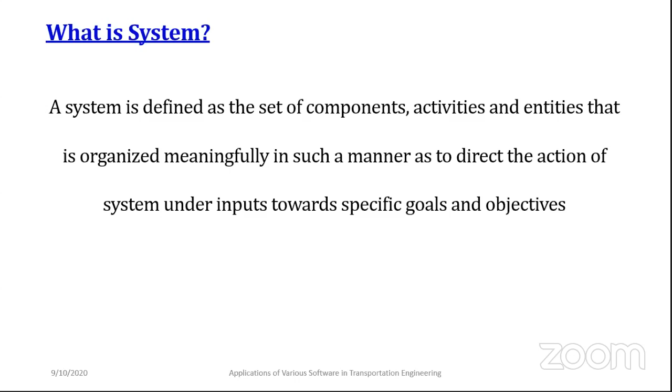This is a generalized definition of a system. But when it comes to transportation, how is the system defined? The transportation system is nothing but the combination of different modes - it might be airline or airways, waterways, railways, as well as roadways. So the combination of all these ways - and within each way, if you go to the micro level, you might see different classifications. For example, when we talk about roads, we have buses, two-wheelers, trucks - so different kinds of classifications are there, and all these things are considered within that particular transportation mode.

Within that mode, we have different things. When we talk about roads - signalized intersections, unsignalized intersections, foot overbridges, flyover bridges - all these things are considered together when we try to develop that system, which we consider a transportation system. So the transportation system is nothing but the combination of all the modes as well as all the ways to achieve our goal. Our goal is to make the flow smooth when you are making your journey from your origin to your destination. If you are providing and fulfilling that requirement, that is considered a perfect transportation system.

So basically, the transportation system plays a major role in four categories. One is economic.

It is giving the input for the economy of India or any other country. It is developing and creating social and cultural interactions between people as well as road users. The political things also play a major role, particularly when it comes to military purposes. Finally, it gives a major role for environmental conditions. So these are the four major roles of transportation systems, how it gives contributions to society.

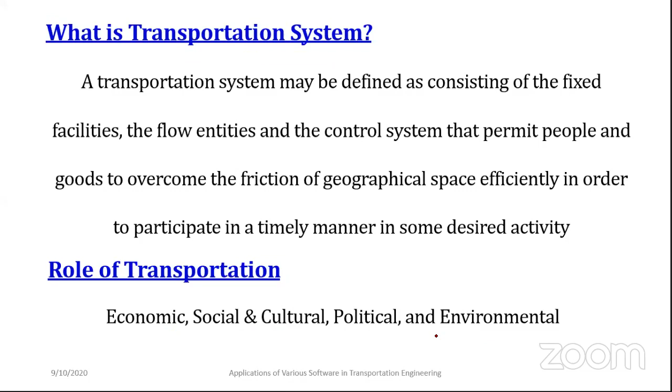So with respect to the things we discussed in the previous slide, these are the different kinds of modes. So altogether we consider as modes of the system: highways, airways, waterways, and ropeways. And for each way, when we talk about highways, it has a way.

That means we have to construct the road. It might be the pavement road or the flexible road. Different kinds of vehicles are there - it might be the motorized vehicle, non-motorized vehicle, electrical vehicle, or autonomous vehicle. Then the terminal, the stations, and the parking area. The control, as I told, signalized intersections or signboards and all. So all this together is considered as components of the mode.

Likewise, each mode has this component. Finally, here we play the major role of how the planning has been done, evaluations have been done with respect to the design, constructions have happened, we applied for the operations, and finally the maintenance happened for that particular facility. So this is the development of each component, how stage by stage it has happened. So all these three together, what we have provided on the field, is considered as a transportation system.

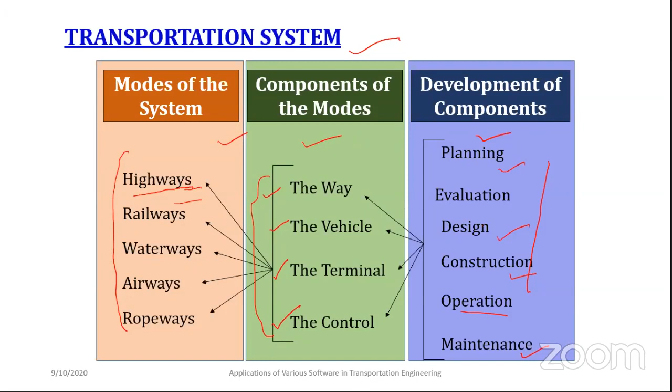So this is the definition of the transportation system. I hope everybody is getting a clear knowledge. So with respect to that, this is a generalized definition of transportation engineering.

For example, if you want to transfer goods or passengers from one place to another, that is considered as transport - that is named transportation. To transfer all the goods and passengers, whatever science and technology we have adopted in that field, that is considered as transportation engineering.

So nowadays we have advanced facilities. For example, Metro technologies are there, mass rapid transit systems are there. These are the things coming under transportation engineering.

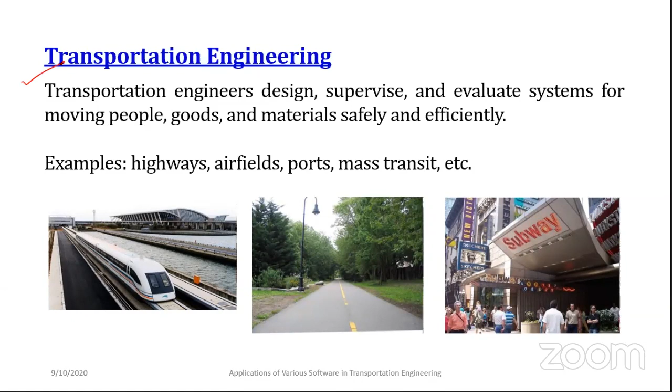The main purpose for providing this transportation system or engineering is to provide accessibility. It has to access all the land use patterns and all areas, like a village, rural area, cities, or town. So people have accessibility or connectivity provided with respect to the provided facilities. Then there's movement efficiency - mobility, providing the things does not matter, but how efficiently we have provided it matters.

We have to check the actual demand. It has to fulfill the demand. According to that, we are providing the facilities. And the major things are space utility, time utility, and quality utility. So this is why we need to provide a proper transportation system, considering accessibility and movement efficiency.

So when we talk about research as well as software, mainly we have to consider what the demand is. With respect to the demand, how efficiently it is fulfilling the requirement - those kinds of simulations and analysis we can perform by using various software, as well as checking accessibility.

So you can design your road network or your particular city. For example, the Hyderabad city - from Hyderabad city, how the accessibility is there. When we try to simulate the traffic and all, how the delays and congestions are there with respect to the given road network. So all these main things we have applied and understood by adopting simulations or various other software from the point of planning.

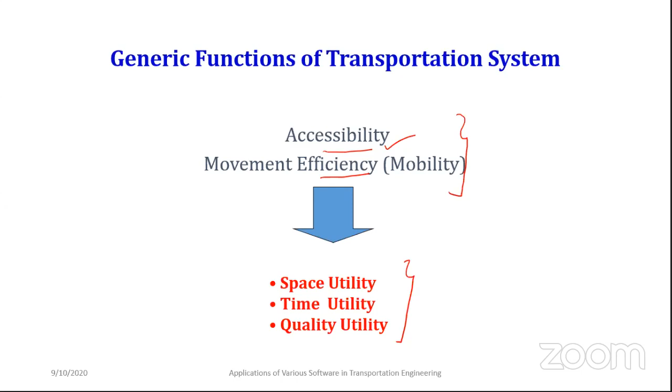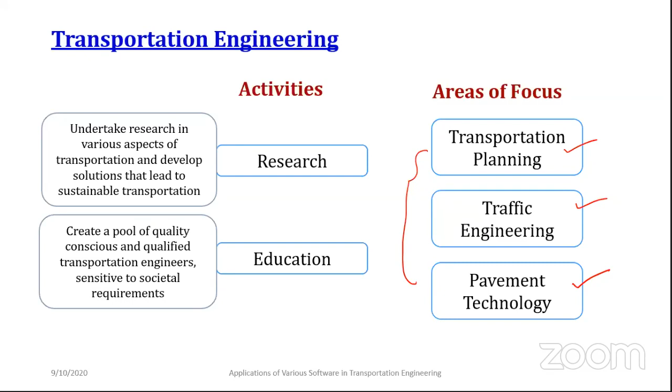So this is a brief introduction about transportation engineering, and it has three classifications: transportation planning, traffic engineering, and pavement technology. And we have various software with respect to these three major areas. So we can see plenty of transportation planning and engineering software, as well as some limited pavement technology software. We will see that in the second part of today's presentation.

So traffic engineering - very quickly I will give this. It is an understanding and study about the present conditions. If you want to adopt some software and study about traffic engineering, this is what we are going to study.

One example is delay. When you're traveling in a particular city, say Hyderabad, during your peak hour - morning office hour, 8:30 or 9 o'clock - it is office hour, so many congestions happen.

So 4-lane roads in a 5-kilometer stretch face a lot of congestion. You have to design that existing road as well as the given volume, generate the congestions using that existing model, and compare with the field congestions, then remodify your model.

Once the model is calibrated, we try to adopt some solutions. If you extend the road width or provide extra 2 lanes, you simulate the volume again and compare with the congestion values - what will be the congestions with the 2-lane expansion, versus without expansion, that is the actual congestion - and we compare.

So if the congestions are reduced, then what we proposed - the extension of the road width - fulfills that particular requirement. This is one study with respect to traffic engineering: how congestions can be modeled, calibrated, and checked against various solutions. Like that, we can study various other issues.

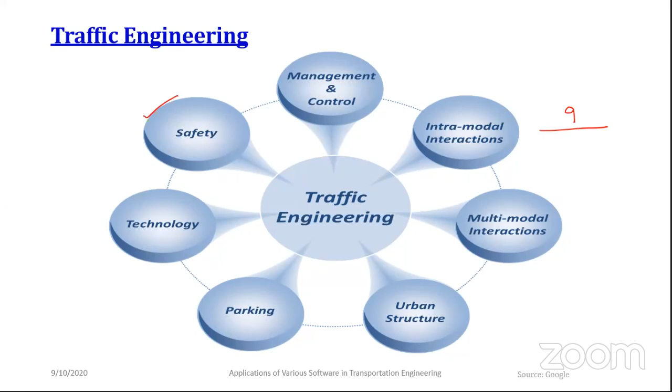So these kinds of studies can also be applied in the traffic engineering field. This is an overview - what are the present conditions, with respect to the present conditions how we can make and calibrate the model, and what solutions we can provide - that is covered under traffic engineering.

Next will be planning. Planning is actually a baseline - what are the base conditions, and what will be the conditions after 50 years? So we make projections, and with respect to those projections, how the city's growth has happened, that we try to simulate.

In transportation planning, two things play the major role. One is statistical - the projections, in the sense of forecasting. How forecasting happens when we talk about pedestrians, how forecasting happens with respect to bicyclists - statistics play the major role here. Second, when it comes to projections, how cities are simulated at the macro level is also studied in the planning area.

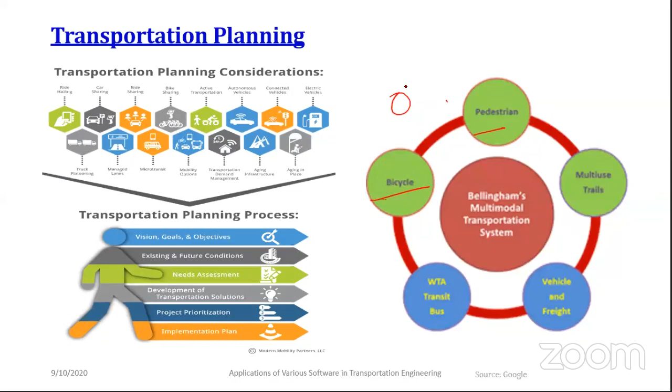So these are two different kinds of things - how traffic and transportation planning work, and what we can cover, and what software is available, which we'll see in further discussions. These are some of the selected modes, and some of the issues we can see: congestion and delay, accidents, pollution, growth of vehicles. We can even develop pollution models - that comes under statistical evaluation.

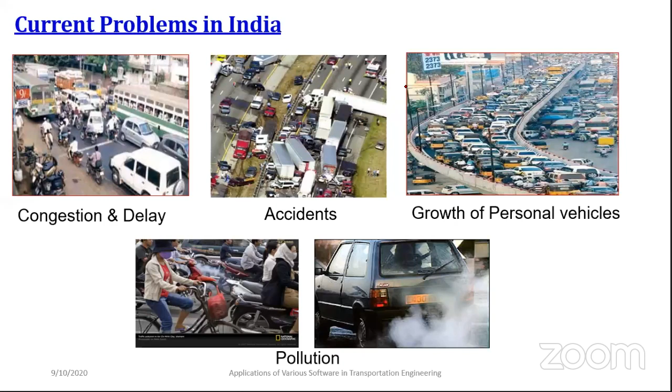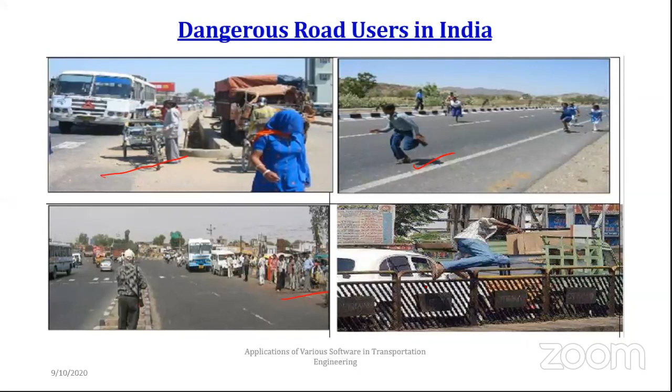So these are some of the listed current problems, and behavior also plays a major role - example, human behavior. You can see how illegal parking happens, how violations happen, and there is no sufficient waiting area. Again, pedestrian violations happen, and this is overflow, and this is contra flow - it's coming in reverse, how contra flows happen - and this is a sidewalk which we have provided, but two-wheelers are still using it.

So what are the issues with the provided roadway width in that particular field? These are some of the loops, or conditions, that exist with respect to behavior. When we talk about simulations or software, it's not only to simulate or study the facilities we have provided - we have to study and understand the behavior of the road users also. That gives the major contribution when it comes to planning as well as traffic.

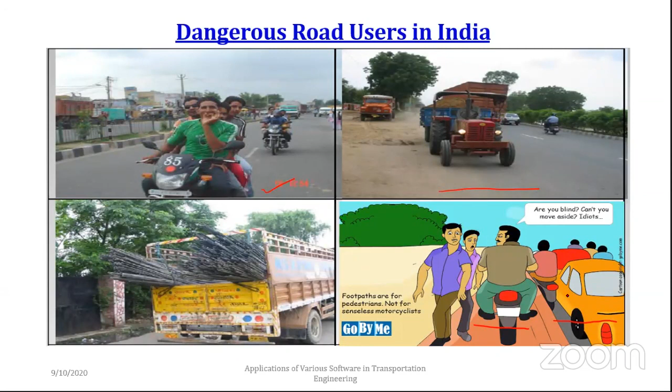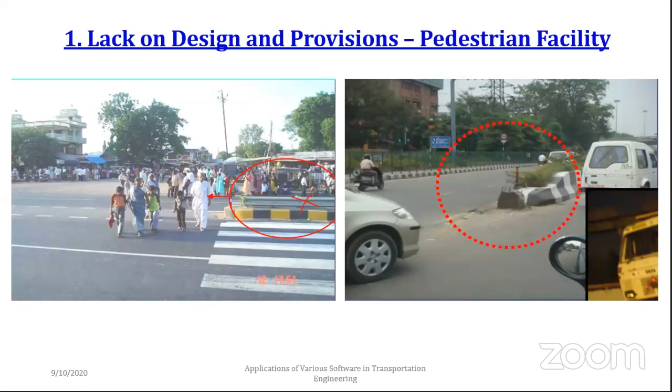Next will be the design. So improper design - this is a refuge island, but there is no refuge island. Due to this kind of design, safety issues happen, and that can be studied using simulation software. These are some of the issues - how, when constructing without a proper plan, issues happen with operational and management.

So we know the volume, and with respect to that volume, whether we have provided the facilities or not - some obstacles or encroachments are there in that particular area. How the social force models have changed - those kinds of analysis we can see to solve the operations and management related issues.

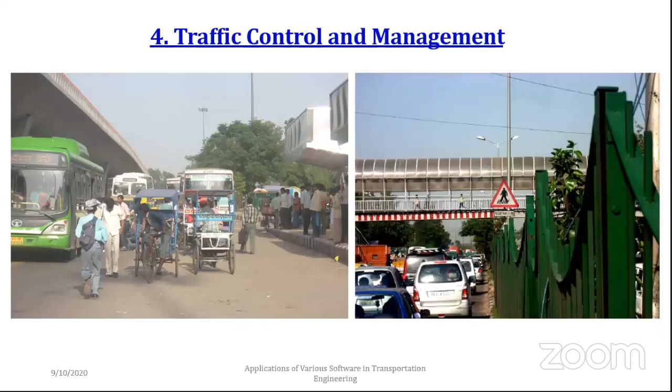When it comes to traffic control and management, we can study and discuss the applications of sign boards and marking, bus bays or road bays. This is slightly with respect to the lack of enforcement, which is not incorporated in any of the software.

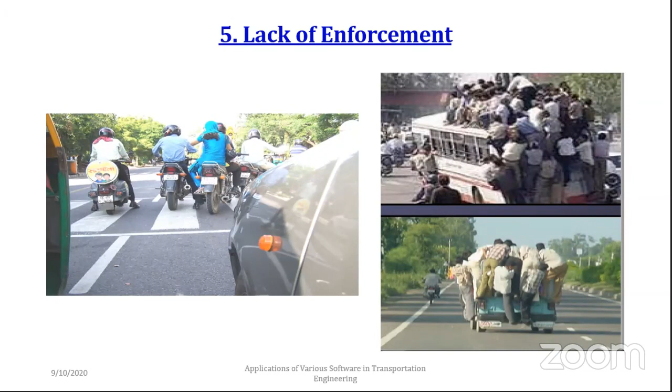For example, if 30% of violations happen, when we try to simulate how the violations are neglected or to be considered in that simulation, that should be factored in when it comes to the simulation. So these are the things we can discuss with respect to human factors as well as design factors.

Whenever research comes, we have to focus in two directions. Your research might be narrowed down to a particular area, but the aspect should be in two directions: how road users' behaviors are there. For example, when talking about lane changing behavior, how has it been considered - without that lane changing behavior, how are smooth flows given? The lane changing behavior has been considered with respect to two aspects: the facilities provided, or the corridor considered.

The second will be the behavior - maybe the adult or older persons, or the male and female. With respect to those social characteristics, how the behavior of lane changing happens on that particular field can also be studied and incorporated together for bringing solutions to those issues. So these are the two aspects we have to consider when it comes to the research aspect.

In the further slide, I will quickly cover the area and topic we can focus on. Then we can move on to how to achieve this research topic by adopting various software in the given three aspects.

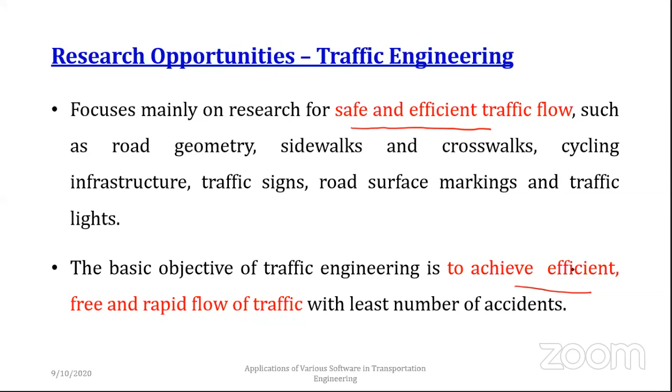When it comes to research, as I told, traffic engineering mainly focuses on the current problem - what are the existing conditions, to make the flow safe and efficient, what issues we are facing, and what we need to consider when it comes to research should be studied under traffic engineering. The main objective of traffic engineering research is to achieve efficient, free, and rapid flow of traffic in the given area, to reduce or avoid accidents.

Basically, when it comes to traffic engineering, there are five main scope areas we can focus on: traffic study and analysis, operations and control, geometric design - the horizontal alignment and vertical alignment, slope, elevations - those things have to be considered under geometric design. Then administration and management. Finally, the second category is planning and analysis.

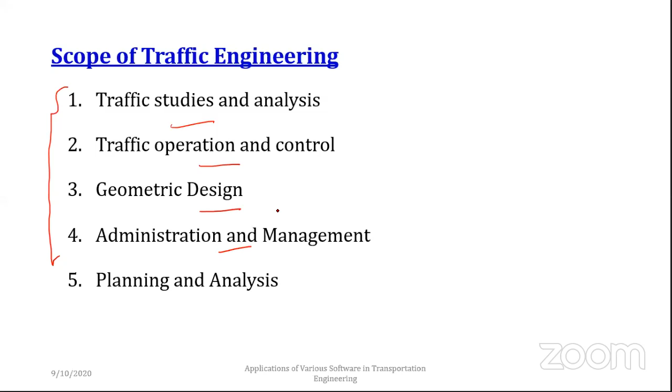When it comes to traffic studies, we have to study volume, speed, delay, queue, parking, demand and supply, origin and destination studies - all those things are considered under traffic studies. Based on that given or collected data, we can study the capacity and level of service.

Also, we try to simulate all those things. For example, when talking about traffic volume in a particular area, with respect to the field, what is the traffic volume by considering different factors. The same when we try to adopt it in simulations - how the models are working, how things are calibrated, so that we can modify that calibrated model. This is one example of traffic study, particularly traffic volume projections for future conditions.

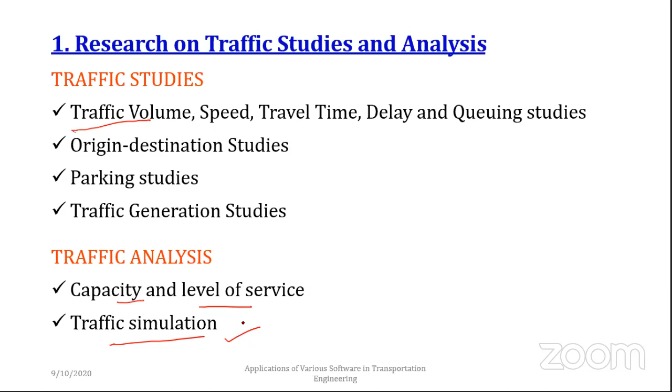These things can be done in the VISSIM software, which we will see in tomorrow's class - how we can do the calibrations with respect to VISSIM modeling.

The next one will be traffic control and operations. It's a simple understanding. One example: when you're providing a traffic signal, we have the traffic signal time, which might be 60 seconds or 120 seconds. How the signal times are designed with respect to volume is one example we can study to control and give operations for that field condition. This kind of research is one example under this area, which can also be done using micro-level simulation software.

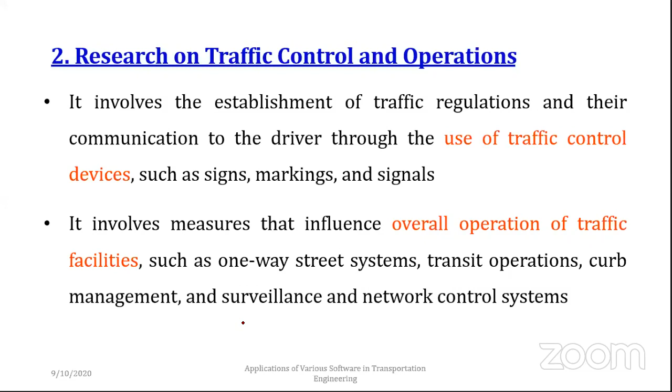We can also consider various priorities in a particular road. If you want to give priority to only the bus route, how the bus priority is given in that signal design has been considered in this area.

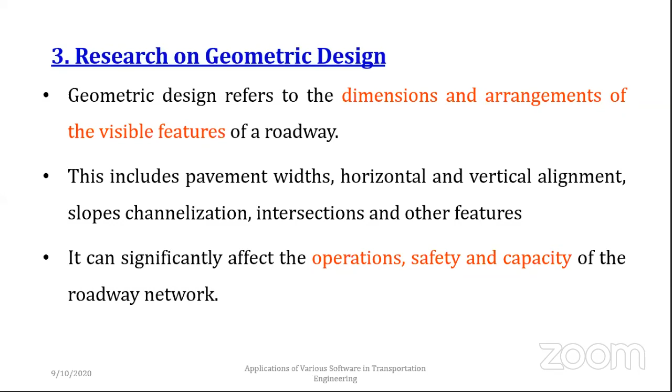Then there's geometric design, which we have discussed, with respect to the horizontal or vertical alignment, dimensions, or lane width. How the complete geometric design has to be taken care of with respect to the requirement of that particular city or area.

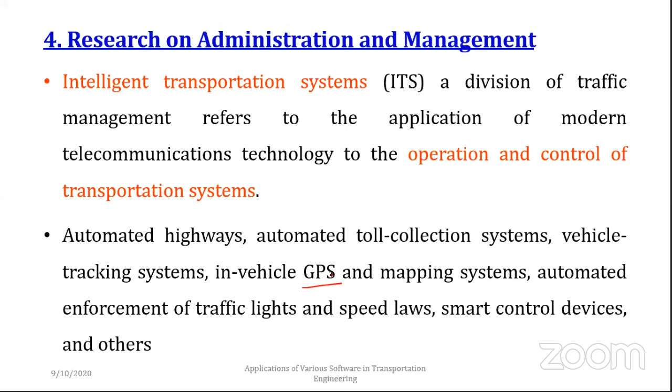Then there's the administrative and management level, which leads to an exclusive research area, nothing but ITS, Intelligent Transportation System. How we are adopting various technologies like GPS, how GPS devices or other advanced technologies are adopted to make enforcement, and how various algorithms are adopted to create smart systems. These come under administration and management.

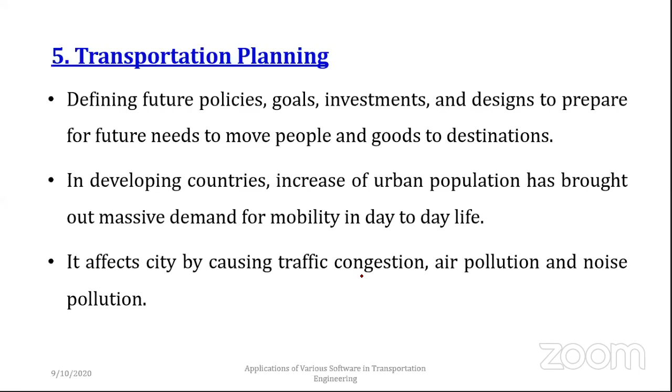The final one will be planning, which we already discussed. What will be the baseline? What is the future condition? To fulfill the future conditions, what kind of solutions we can provide on the field is considered transportation planning. These are some of the topics under planning.

Under planning, we can study personal cars or public transportation, commercial vehicles, and also freight movement. How freight movements happen is also studied. All these things are covered under planning, and the main application of planning is to motivate people to use public transportation. So when we talk about planning, most of the research shows how public transportation is encouraged by providing various facilities.

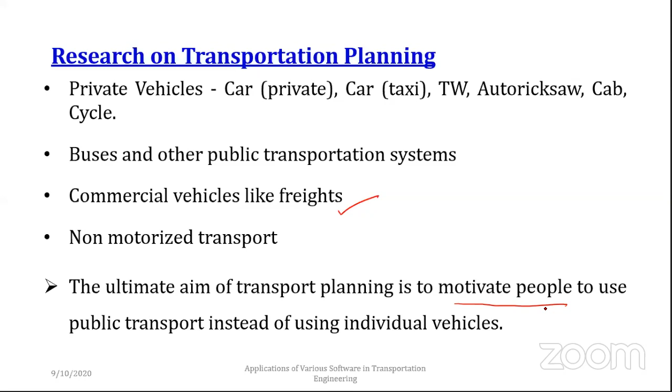Here are some topics which can be modeled and used with respect to various software. When we talk about travel demand modeling, land use pattern, and freight, all of it is required.

Route choice behavior: here we are designing for a particular city, Hyderabad. Suddenly in one area, interruptions happen due to a natural disaster, some other issue, or an accident, and that road is blocked. During that time, what are the other alternative options to maintain smooth flow? Such route choice behavior is analyzed using various optimization techniques as well as simulation tools.

We can also perform economic analysis and try to integrate various facilities. Here I showed a port as one example. But when we talk about a railway station, there we design multi-modal operations, for example bus stops, taxi, railway station, as well as pedestrians considered together. If you want to integrate all four modes at a railway station, what are the present conditions, what will be the future scenario, and what facilities can we provide? This can be analyzed and studied using various software in the field of transportation planning.

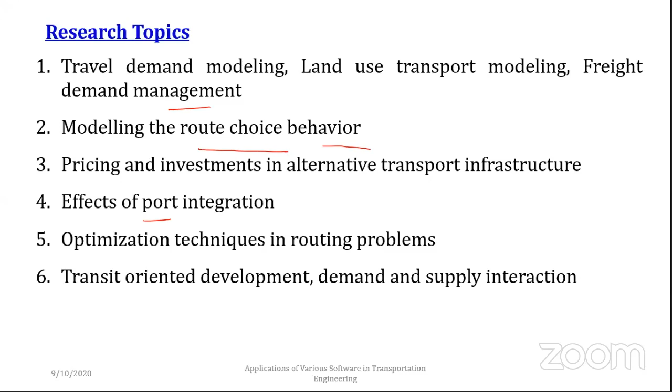This is with respect to safety and the simulator. As I told you, not only facilities, we have to consider social characteristics too, with respect to young and older behavior, male or female behavior, usage of helmet and seat belt. These are all studied using the driving simulator. Driving simulators are there, and using the simulator, all this behavior of drivers is also studied.

Not only motorized transportation, we can consider non-motorized transportation also. But whatever model we are doing, with applications of software or without, data is a mandatory task. Data plays the major role when it comes to transportation engineering, irrespective of pavement, traffic, or planning. And what data are required?

Different kinds of data are required to create a simulation model. One is the road network pattern: what is the width of that particular road, and whether medians are provided. If provided, what is the width of that median? Then the crosswalk markings, what is the design of that marking? All these things have to be collected from the field. You have to go to the field and measure the requirements of that geometric design, and give it as input.

The second one will be volume, pedestrian or traffic volume, with respect to your particular study. If you're studying speed, you have to collect speed data from the field using videographic methods, or maybe radar, or some other ultrasonic measures which can measure the speed of that particular vehicle on the field. All this requirement has to be collected in two aspects when it comes to the studies.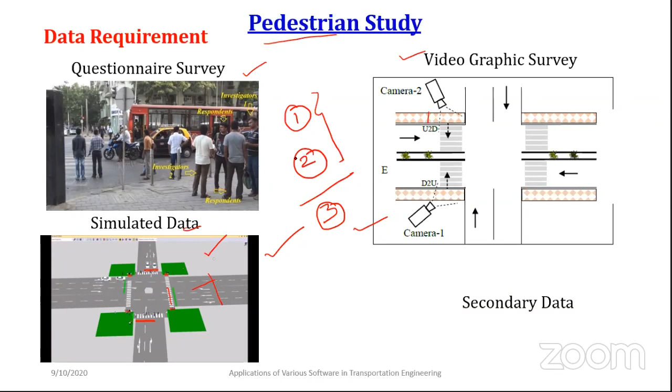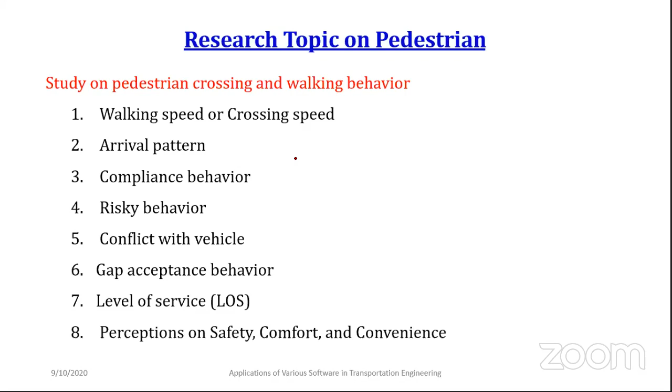And these are some of the research topics: walking speed or crossing speed, arrival pattern, conflict, gap acceptance behavior - all studied from the point of view of pedestrians, and the same studies can be adopted for bicyclists also. This is a little bit advanced, how pedestrian behavior has been studied.

Pedestrian facilities - various different kinds of facilities are there. For crossing the road, you might study different kinds of applications. One is the subway - if you're providing the subway, how are the conditions there. Second scenario, if you're providing the foot over bridge, how do things happen. Third, if you're providing signalized intersections for pedestrians, how do things happen. So pedestrian facilities, various scenarios can be tested using simulation or other software. This is related to the pedestrian.

So whatever the topic we have discussed so far, it is in a very brief manner with respect to the traffic in the field of motorized as well as non-motorized transportation. And we have quickly seen how the data plays a major role.

Now we can move to the software. As I told, when issues happen, practically it is not possible to apply the solution on the field and check how it is fulfilling the requirement. That is the reason we try to adopt various software. In the software itself, we try to analyze various scenarios with respect to the provided solutions, and whichever will give the best solution can be adopted and applied on that particular field. So that is why we require the software—the major applications of software in transportation engineering.

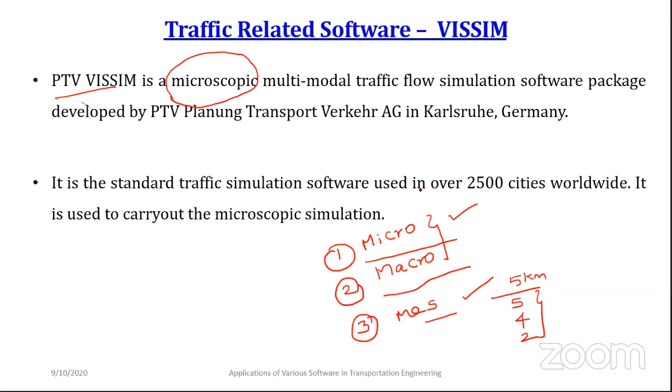When it comes to traffic related software, VISSIM—the most widely used software, PTV VISSIM—is considered a microscopic simulation software. It specifically takes one particular facility or one particular mode, and according to that we study the areas, issues, and solutions. This is a standard traffic simulation software used by 2,500 cities worldwide.

So here we can simulate the different kinds of modes, like vehicles. It might be a car, a two-wheeler, or a truck. Then the public transportation system, buses, cycles, pedestrians, auto rickshaws. So all these facilities can be simulated using the Vissim software.

Here we can give priority rules. For example, if you want to give the bus priority, you can give the priority and assign and define the conflict area, that is also feasible. So you just specify some of the requirements to make the study related to safety, that is also feasible in that particular area. And we can study signalized intersections.

We can give a fixed signal time, for example 120 seconds, and define how the green time, red time, and yellow time are given. With respect to the fixed signal time we can analyze, and with respect to vehicle actuated programming also available based on demand, we can simulate, control, and manage that particular signalized intersection. That is also feasible in the Vissim software.

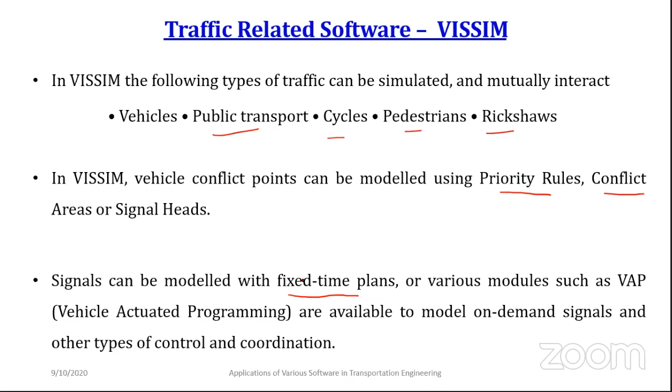Basically we can extract and work on applications in a wide range using Vissim software, mainly traffic engineering, public transportation, urban planning. And these are some of the selected scope.

We can compare the geometric design of junctions. We can try to study traffic development planning, capacity analysis. The roads are there - what is the volume, what is the capacity, how is it performing. Those kinds of analyses can be performed.

Traffic control system - as I told, various signal timings, you can do it, we can analyze it. You can study the public transportation system.

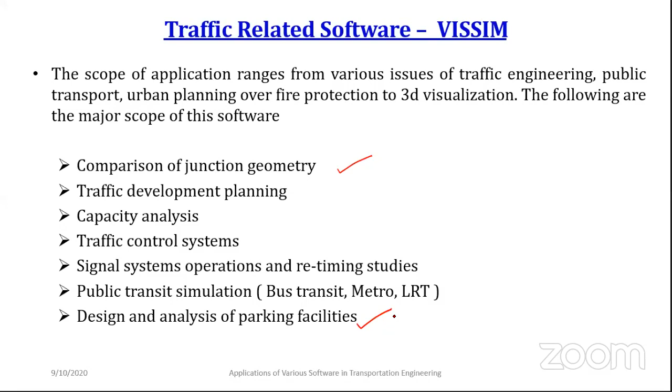And the final important one is parking studies. Wherever we talk about parking as the main issue, in Vissim you can create parking slots, or you can design a parking building or terminal. We can study legal and illegal parking also. So all these things are feasible and possible when we talk about Vissim, which performs micro level simulations, and we are bringing various solutions.

And Vissim simulates complex vehicle interactions also at the micro level - how the interactions between two vehicles happen, car to car, or car to bus. Even we can consider pedestrians also, but with some limitations.

Here we can give our requirement, what will be the demand and what will be the supply, and we study the behavior also. For example, we studied lane changing behavior. Then we can simulate new forms of mobility, and we can integrate various software. The most important software is PTV Visum, so we can include and integrate PTV Visum to make it a planning tool also.

The output is very easy and flexible to interpret, for example what the travel time will be for a particular corridor, or what the queue is. So everything you get in a better manner when comparing with other simulation software.

As I earlier told, it is a user friendly Vissim software. So tomorrow when we work on hands-on practice, we will be able to see the applications of the Vissim software, how it is user friendly.

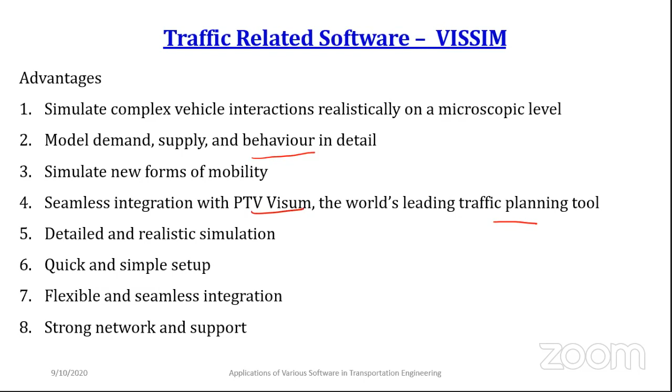But it has a limited disadvantage, because the links have limited capacity, and the priority rules are changing, particularly when we are talking about pedestrians. So pedestrian studies are not focused on at the micro level in that particular software. So this is a brief detail about Vissim.

So the second one will be VisWalk. When we talk about Vissim, it has a little limitation and disadvantage when talking about pedestrians. At the same time, PTV VisWalk is developed, which is exclusively focused on pedestrians - how planning happens for pedestrian facilities, and how to simulate various pedestrian behaviors in normal conditions as well as crowd conditions. So those kinds of micro level studies and research we can do using the VisWalk software.

Here the input is based on our input. We study and understand the pedestrian behavior from the field.

We can give the actual behavior of the pedestrian. For example, if you want to give the walking speed of the pedestrian at that particular location, you might be collecting that speed from the field, so you can give those actual conditions. You can also create various social force models, how opposing persons are coming and how particular persons react to the opposite person to avoid conflict. So those kinds of representations and modifications we can perform using the Viswalk software.

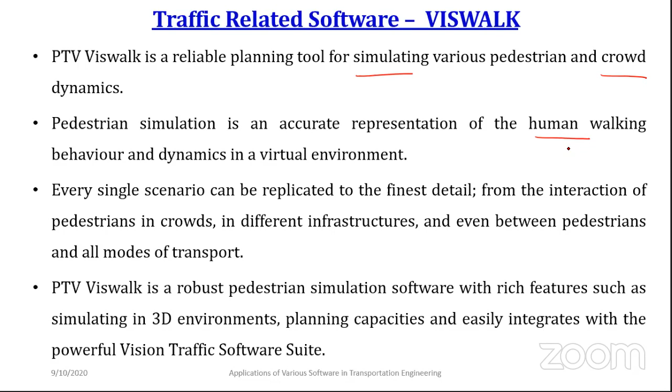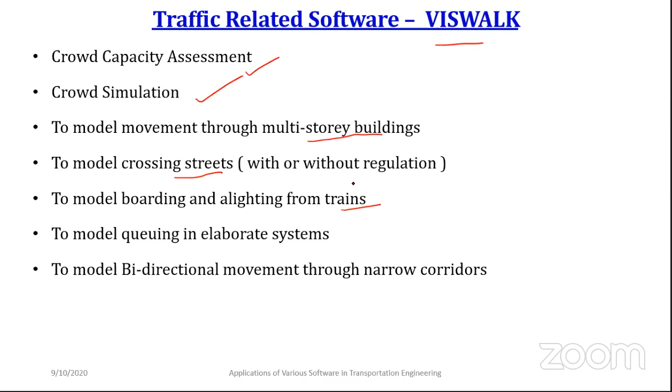So these are some of the scope, and it has various advantages as well as disadvantages. It replicates and analyzes human behavior, and this is one of the best software to trust when you want to simulate pedestrian facilities. Here we can give various solutions and analyze with respect to improving safety, particularly in evacuation conditions.

The study is mainly focused on crowd analysis. In crowd analysis, what evacuation measures we can provide and how evacuations happen can be studied.

The software is used with respect to each other because both are developed by PTV, so each has a link to the other - we can give the input as well as the output for each other's software. So if you're studying some problem in PTV Vissim, whatever data or output you are extracting can be given as input for the Viswalk software. So that kind of linking possibility has been provided under the PTV facilities.

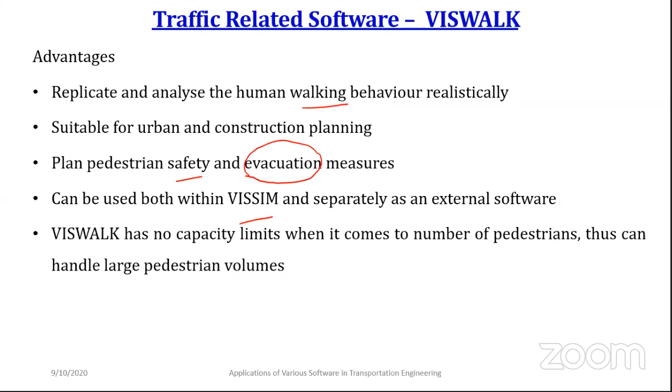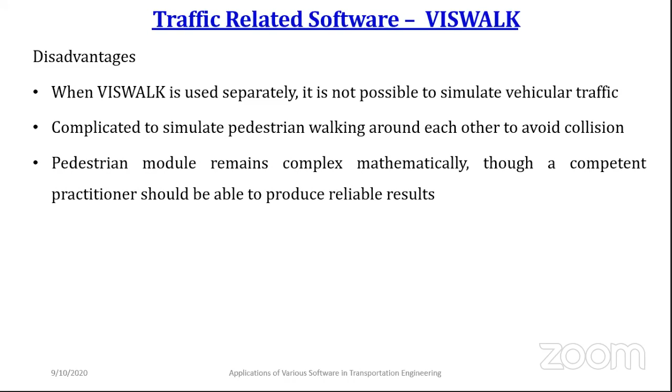The disadvantages here are that it does not simulate vehicular behavior and it gives complex mathematical examples. Whatever simulations it does in the software has some theoretical background behind it. In that theoretical background, if you want to make modifications under mathematical formulations, it is highly difficult to reformulate those mathematical expressions, and that is giving the complexity here.

The next and final one will be TRANSYT. Hereafter I will cover things very quickly. TRANSYT is mainly focused with respect to signal - if you want to optimize the signal, what are the things? An existing signal will be there, you optimize the signal, and if you're giving priority for the bus, how the bus priorities happen. So those things happen and simulations are done from the point of view of signal optimization.

Basically it gives designing, evaluation and modeling for single isolated road junctions, how it has happened. Also here we can give mixed traffic conditions, which are also feasible for all these three softwares. So when we talk about simulation, particularly for Indian conditions, we follow a mixed traffic condition - those kinds of changes we have to make, then we can get an output from that particular thing.

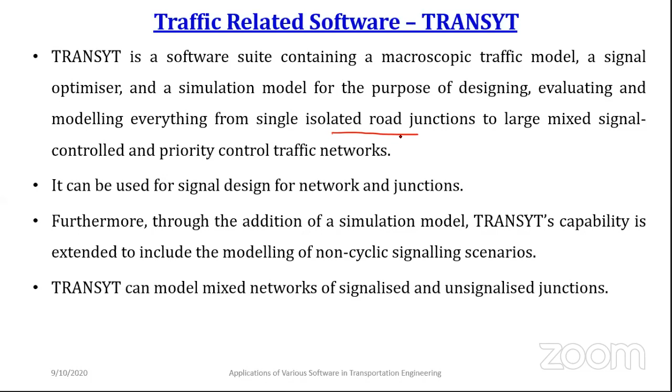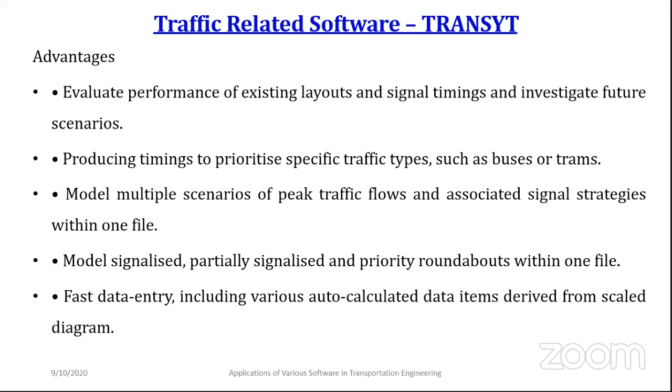So when we talk about TRANSYT, we are exclusively studying intersections, whether signalized or unsignalized. The first and foremost thing we study is the optimization of signal time. Second, we can study different kinds of facilities - only bus priority, how things are there - and coordinations. So in a corridor with four signals, how coordination happens between the four signals can also be studied, and that is giving the most advantage in the TRANSYT software.

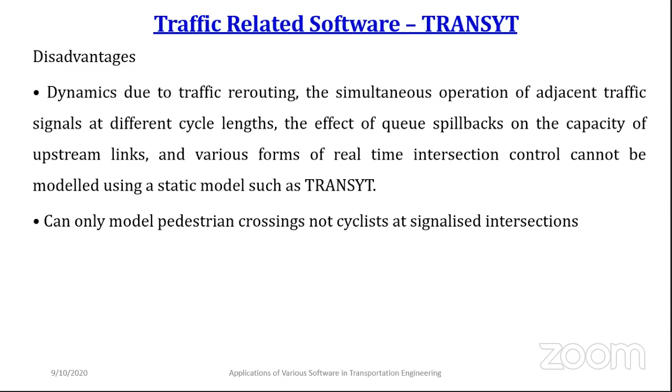Still, non-motorized transportation facilities - how we incorporate those in particular things - that is giving complexity in that particular software.

So whatever we have seen so far, that is related to Vissim, the most widely used software in micro simulation. Second, Viswalk, for how pedestrians are considered when coming to the simulation. Third is TRANSYT, if you are studying about intersections with or without coordination, and with or without signals, how strategies can be provided and performed. TRANSYT software is one of the best software to adopt for research in that area.

Next, moving to planning. When it comes to planning, Cube is one of the most widely used software. So what exactly we are doing is building a model and calibrating it. When it comes to future conditions, what solutions happen? That is what we study in the Cube software. Basically, when it comes to planning, you might be aware of the four stages: trip generation, distribution, modal split, and traffic assignment. All four stage models can be designed using the Cube software.

To design the four stage model, you might consider various factors, example transportation networks, land use patterns, and population based on present conditions. So the four stage typical models are designed and you collect various outputs. This is based on the baseline. After 20 years, what changes happen with respect to population? It might increase by 30 percentage. Land use, example, the density is reduced or it is occupied more. And the network is changed, different patterns change and new things happen. So considering that future scenario, what will be the four stage model that can be modeled and analyzed in the Cube software?

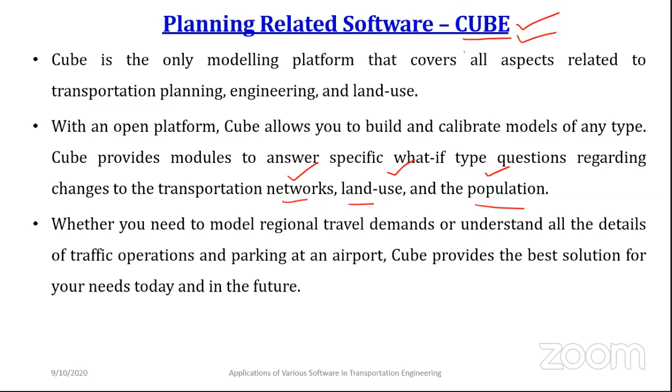So basically, when it comes to planning, the four-stage model plays the major role. The four-stage models are calibrated and designed in the Cube software. When it comes to future scenarios, by changing the demand or different variables, how the four-stage models perform can be modeled and studied in the Cube software. Basically it gives the model assignment, improves the quality, and changes the road network pattern when designing. It allows you to view, edit and create data for the public transport network exclusively, and you can change parameters, not only land use and various factors. It is easy to change and analyze how things happen in those scenarios.

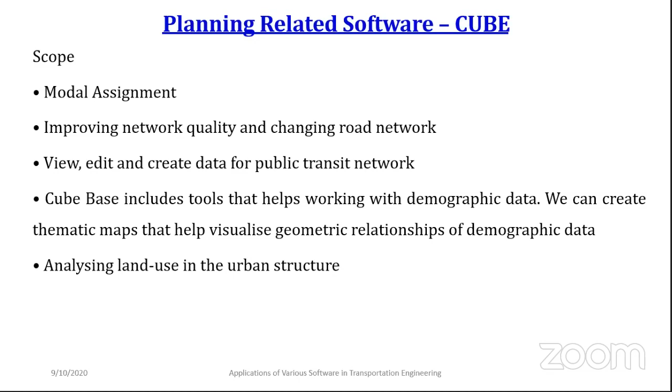And there is no black box. We can give GIS capability and flexibility in building a model. Mostly it is avoiding and reducing human error when we try to model, because two things play the major role here. One is the field data given as input, the secondary data, and the model exclusively depends on the mathematical approach. So that is the reason human errors are less compared with other software, and various scenarios we can analyze and bring various solutions.

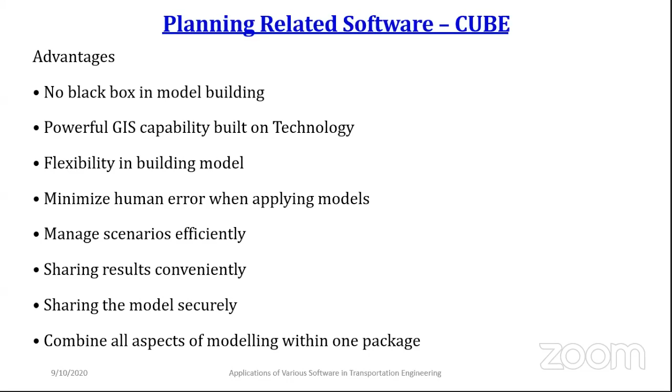So this is the thing. Cube has different packages actually. When we're talking about car passengers, we have Cube. If you want to study about freight exclusively, we have a different kind of package. When we are talking about parking, that also has different packages. So Cube has different packages which can be adopted for the different needs of researchers.

So the next planning software is the VISUM software. This is also one of the software for how we can perform analysis at the meso level. Here traffic can also be analyzed, and with respect to land use patterns, how modifications happen when we try to adopt some policies and strategies, how things are changing, that can also be considered.

So as I told, when it comes to planning, the most priority is given, and transportation planners as well as engineers encourage road users to adopt the public transportation system. So most research is happening and focused toward public transportation, and all the software gives priority in the most friendly manner when trying to adopt and apply public transportation related services and research. So that is also adopted in the VISUM software.

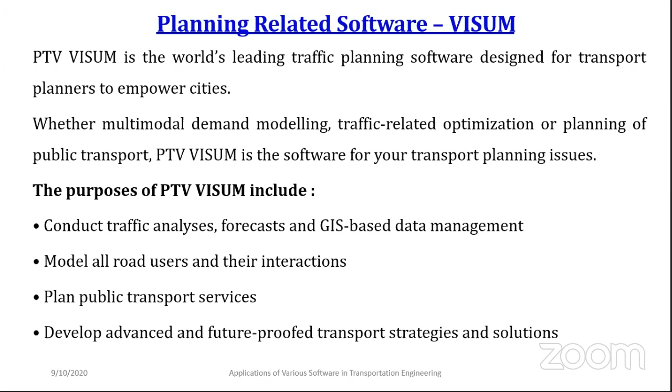The next and final one is the NLOGIT software. It's not exactly a planning software; it's a combination of planning and statistical software. Basically, it's used for solving transportation planning related research and issues. But what we're doing here is more of a statistical performance. We're not doing simulation kind of studies, but various mathematical analyses. For example, we have various socioeconomic characteristics, population data, and different traffic characteristics, and all this data is given as input. Based on that input, we get outputs by adopting various mathematical approaches—that's what we study in the NLOGIT software.

One example is planning related. If you're using a motorized vehicle and want to change to electrical vehicles, or want to change to a car, how do human behaviors change by considering various parameters? So the problems we're studying are related to planning, but what the software actually does is give the probability and possibilities of people changing from one mode to another. Those kinds of outputs we can get from the NLOGIT software. So NLOGIT is a planning related software, but the working is related to statistics—mostly it's solving statistical and mathematical related approaches.

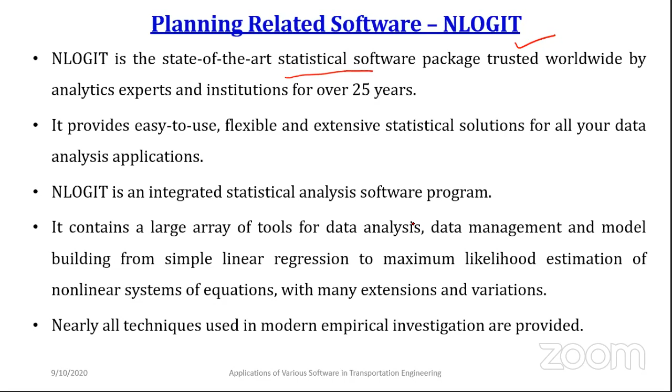These are the scope of it, basically model estimation and data analysis. You might be having data, and if you want to develop a model, what model estimations and analyses can we perform with respect to that—that's feasible here. It's a statistical analysis, and we can get various graphical representations, count data related models. Count data, for example, Poisson's model, Poisson distributions, binomial distributions—those kinds of counting data can also be handled. As I told you, programming—if you want to create your own programming and simulate or model it, that's also feasible here. Time series, multinomial choices, so many things are available.

In the afternoon sessions, I will show all the things and how they can be implemented and applied in the field.

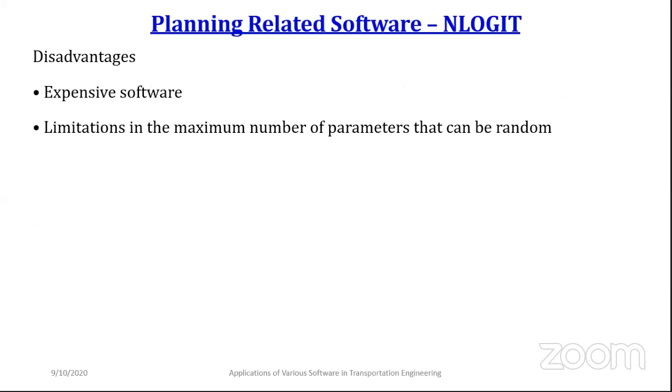Very quickly, I will go through the pavement softwares available. One is the KENPAVE software. KENPAVE software calculates the stress, strain, and deformations in flexible as well as rigid pavements. It's used to model typical flexible as well as rigid pavement structures. That is the application of the KENPAVE software related to pavement technology.

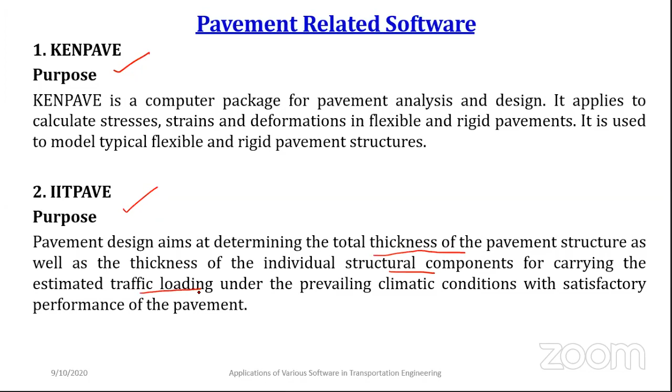Then the IIT Pave, same thing—if you want to design a road, the total thickness of the pavement structure can be studied. Individual structural components can be estimated with respect to different kinds of loading. That's also feasible. We can consider the prevailing climatic conditions as well. This is the IIT Pave software.

Then the HDM-4 software, this is also similar, but here it's related to management—how the analysis, planning, management, and appraisal of road maintenance, improvement, and investment decisions happen. Those kinds of applications and purposes can be fulfilled using the HDM-4 software.

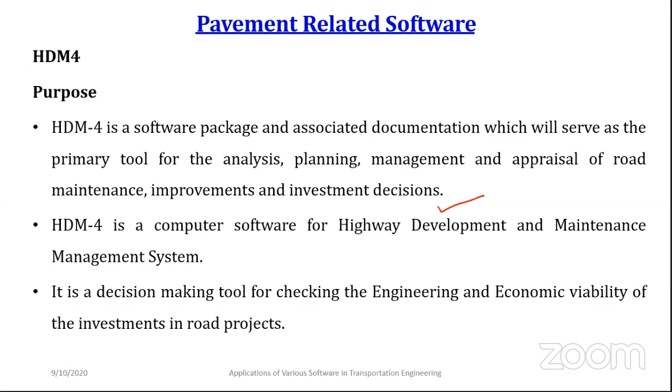The final one is the statistical related software, which we covered previously—SPSS, Statistical Package for the Social Sciences. This is how various mathematical models are developed and analyzed using your data. So this is the one related to statistical software.

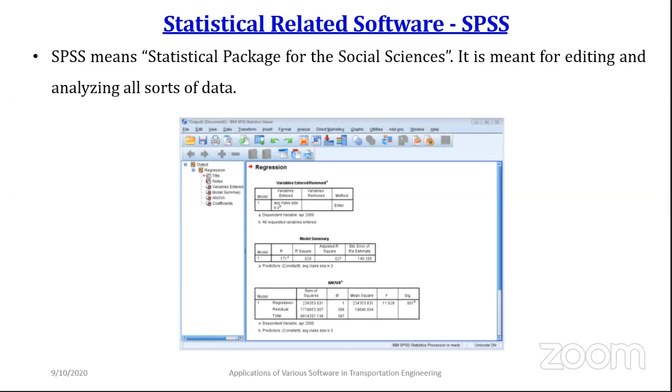So here we have discussed the first part of today's presentation: what will be the actual transportation engineering and the systems working on the field, and various quick issues we have covered, and what research we can focus on in that particular area with respect to the motorized and non-motorized transportation system. So very briefly we have seen that content in the first part.

The second part we have discussed is about the software. We have divided it into three major areas: traffic, planning, and pavement. Very quickly I gave the name of the software and its applications. Each software's main application is to bring solutions by analyzing various scenarios or policies you want to provide. So according to that, we have provided those facilities. This is the brief introduction or fundamental knowledge we have gained from the first presentation of today's session.

The second part is mainly going to focus on two software. If time permits, we can see the Visum software in detail, but for micro-level studies we are going to see the NLOGIT software. As I told you, NLOGIT is mainly used to solve transportation planning related issues by developing various mathematical models. So it is slightly different from the SPSS software.

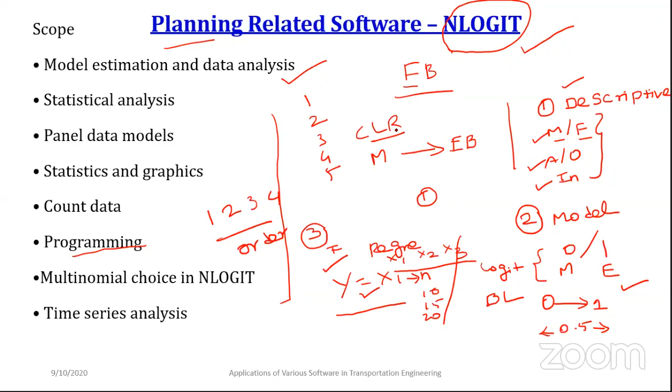You can develop negative binomial models. When it is coming to two scales, it is a binary logit. When your data might be having 1, 2, 3, 4, it is ordered data - so how can we develop that order data? In that case you can develop the ordered probit model, that is feasible if it is in order. If it is not in order, but categorized 1, 2, 3, 4, 5 - categorized but not in order - in that case you can adopt cumulative logistic regression also. That is also feasible in the NLOGIT software.

Next one will be the nested logit model. In NLOGIT software, nested logit is also possible.

Example, if you want to choose your journey - if you are traveling from your origin to destination - you might be having different kinds of vehicles. You have two classifications: one is your personal vehicle, and second will be public transportation. In public transportation, you have the bus as well as the train. So how are we going to choose the transportation mode? The probability might be 0 to 1, but how it is distributed in the nested manner is also studied. Even personalized vehicle has two classifications - two-wheeler as well as car - which one you are going to choose. So the nested logit model can also be applied using the NLOGIT software.

So these are the things we can analyze using the NLOGIT software. In the afternoon sessions, we can start with respect to the available options, and we can narrow it down to descriptive analysis as well as two types of models: regression and the binary logit model.